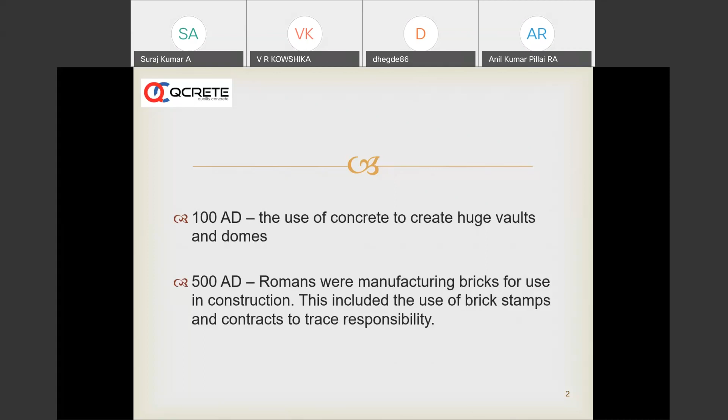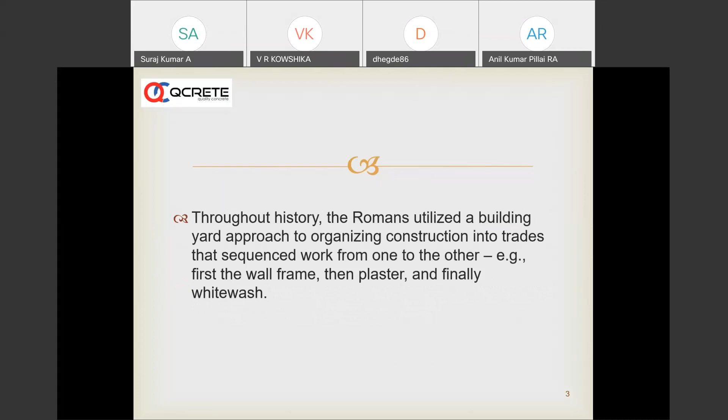The QAQC of construction as a whole is not new. It has existed for centuries, maybe thousands of years ago. The first such usage of QAQC systems was found in 100 AD, when huge vaults and domes were built of concrete, definitely with a lot of planning and QAQC management. Around 500 AD, Romans were manufacturing bricks for construction and included stamps and contracts to trace responsibility, which is part of QAQC. Throughout history, the Romans utilized a building yard approach, organizing construction into trades that sequenced work from one to another - first the wall, then plaster, and finally whitewash. These structures have stood for more than 2000 years, as seen in Machu Picchu, Peru, where stones have been arranged in a curved fashion. The kind of stone organization seen there would not have been possible without strong QAQC.

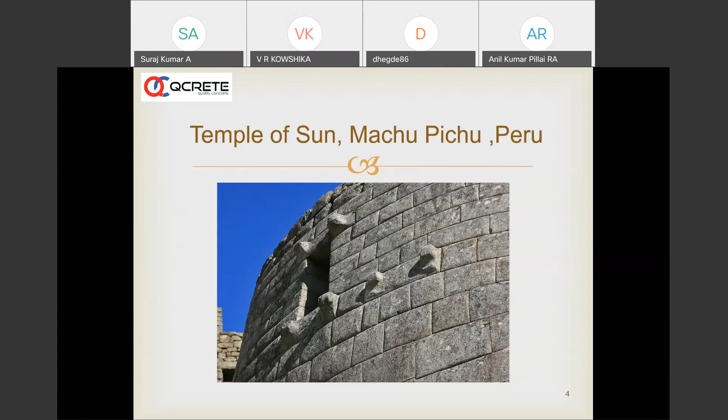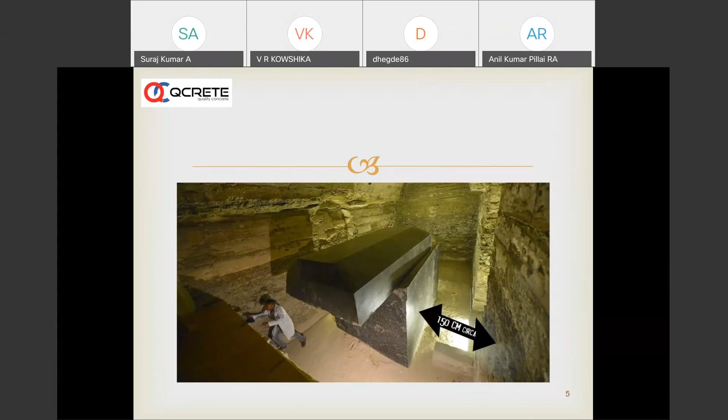Similarly, most baffling aspects can be seen when we visit Egypt. If you go to Saqqara, about 70 kilometers from Cairo, you can see huge granite stones - boxes. God knows what they were planning to keep inside; we don't know. They are highly polished. You can see how, at 90 degrees, the walls have been carved and placed in Saqqara, Djoser, Egypt. This is approximately more than 5,500 years ago. The first kind of stepped pyramids were found in Djoser.

So what we are talking about is quality aspects and QAQC systems. What we are adopting in construction as well as in concrete is not new - our ancestors exhibited and demonstrated high levels of QAQC knowledge and systems in these kinds of structures. The structures we build with concrete today can be seen, in comparison, as infant steps. Huge buildings were built with a high degree of precision thousands of years ago. What we are doing today, like Burj Khalifa and others, after so many years with so much knowledge and improvement in materials, probably will not stand the test of time. So on one hand we have introduced ourselves to modern materials; on the other hand, probably the durability has been lost.

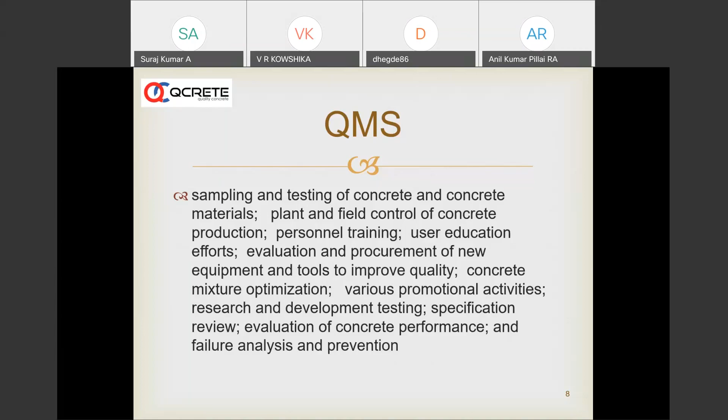Coming to the topic of the day - for example, if you refer to IS 4926, we have three pillars with respect to ready-mix concrete. It has three different aspects: one is forward control, one is immediate control, and another is retrospective control. These are the three pillars of ready-mix concrete we are talking about. The same controls can also be extended to any industry for that matter.

And then the last one, the retrospective control, that is the set of all activities that we do after production. These activities cannot be done during or before production; they should be done after production. So these are called retrospective controls.

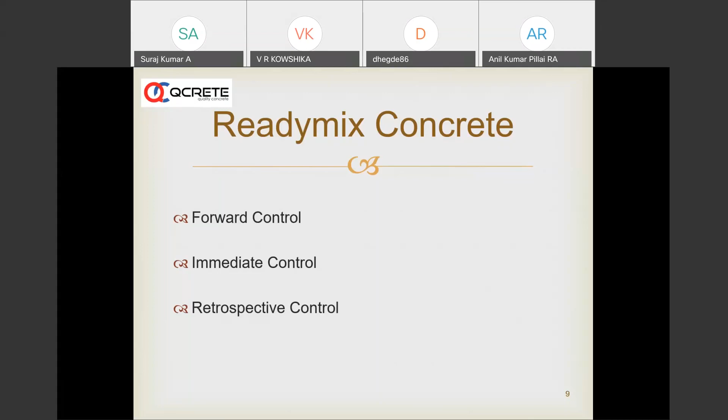I will go a little deeper into most of these aspects, the three pillars. The first one, as we said, is forward control. Forward control consists of the beginning control of purchased material.

Generally when we get aggregates, sand, anything, we do visual checks, take some samples, and do basic tests like grading. We also expect aggregate or sand suppliers to have some sort of certification or testing. We visit their quarries and aggregate production units to check what kind of basic testing they are doing.

We get this information from suppliers. Suppose the suppliers are supplying to other concrete plants or construction sites, we get all data about specific gravity, grading, etc. from the aggregate suppliers.

Most importantly, as the first step in forward control, recognizing suppliers as partners. Earlier, many vendors were not treated well, but for an organization or a ready-mix company to grow in a systematic, organized, proper way, we need to consider and respect the vendors and work with them.

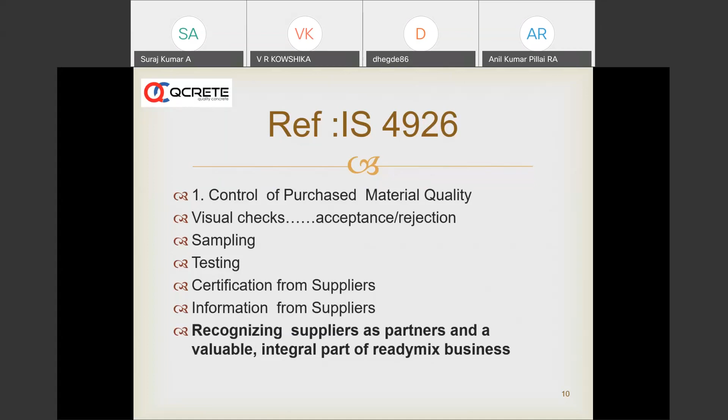So materials, when received, most of the materials are weighed. Incoming materials are all weighed, and the finished product also will be weighed sometimes, but most of the materials that come in are weighed. This is very important as a part of stock control, as a part of inward control.

Then purchase basis - how we are going to purchase the materials - is based on availability. The material should be easily available, and product quality should be as per the corresponding codes, preferably IS codes.

And then long-term relationships - how they are behaving with the particular company, whether they are giving consistent supplies, timely deliveries. Whenever we ask quickly for a particular material, maybe aggregates or cement, how quickly they respond.

Material costs are most important, of course, in an era where all ready-mix companies are competing. Material costs are of prime importance, as well as freight costs. A metal, GGBS, or cement may be of the highest quality, but we cannot bring it from a long distance. So it is better to bring materials from the lowest distance.

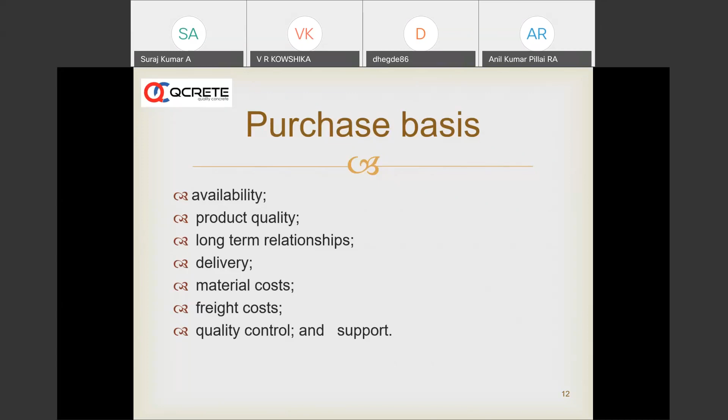Control of material is another aspect coming under forward control - prevention of contamination and drainage of aggregates. Prevention of contamination is most important. For example, we see in some ready-mix companies that 20mm, 12mm aggregates and sand all get mixed.

So what happens in this case, if the 20mm, 12mm aggregates and sand get mixed, the batcher at the batching point will be observing the computer thinking the 20mm aggregate is going in - say 580 kgs of 20mm. But what's actually happening is, within that 580 kg, maybe 100 kgs is sand due to intermixing.

Intermixing happens in many companies. The front-end operators or loading operators don't take care of this, and if it gets mixed, the mix design we give is one thing, but what actually comes out and gets supplied to the customer is another thing entirely from what we wrote as the mix design.

So prevention of contamination - falling of leaves, falling of debris, or other unacceptable things falling onto the aggregates - all these things have to be avoided. And then drainage, especially in monsoon season, you have a lot of water.

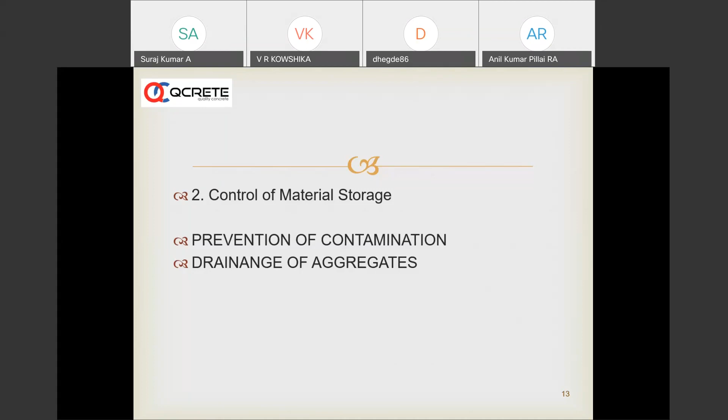There should not be any confusion about which silo stores what material. There should be proper storage and documentation. Generally, you have one or two silos reserved for OPC cement, another for GGBS or fly ash, and they have to be labeled properly.

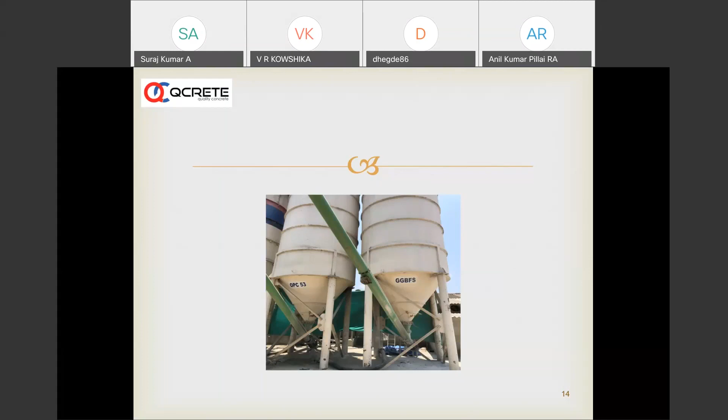When someone names a silo, the batcher or QC, or both in combination, should ensure the right material goes to the right silo. Traceability of materials from receipt to finished goods is an important aspect. For example, a ready mix company should be able to trace which cement has gone to which concrete, which customer, and which aggregates or admixture has gone to which customer. All ingredients from receipt to delivery, until finished goods are supplied, should be traceable back to their sources at any point in time. That is one of the important aspects of forward control.

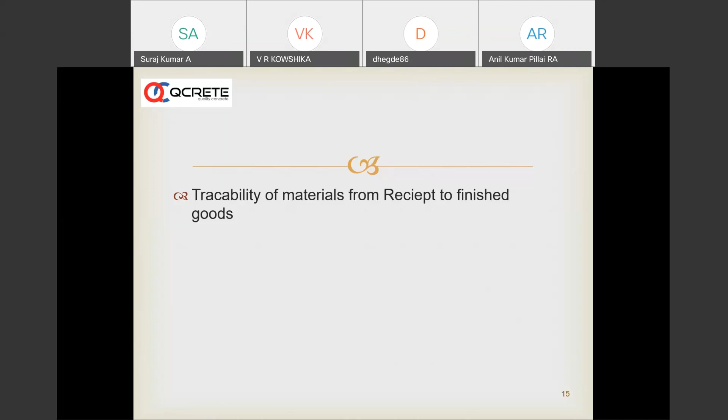Mix design and mix design modification: in a ready mix company, normally qualified engineers do the mix design. They will have a lot of data. Our company, for example, has data from the last 2-3 years, and many companies have this kind of data and history of mix performance. Trials are constantly done as part of continued evaluation of the mixes and continuous improvement.

Most importantly, understanding customer requirements is important. We need to know what the concrete is being used for. For example, a requirement comes for M30 concrete - we need to know whether it is for a floor slab, an industrial floor, or a sloped roof. Sometimes a customer comes with 150 or 200 cubic meters of concrete for a raft foundation or a small foundation, and we need to know whether the foundation is very thick. If it is very thick, we need to recommend SCM-blended concrete, as the heat of hydration will be more. All these things need to be understood.

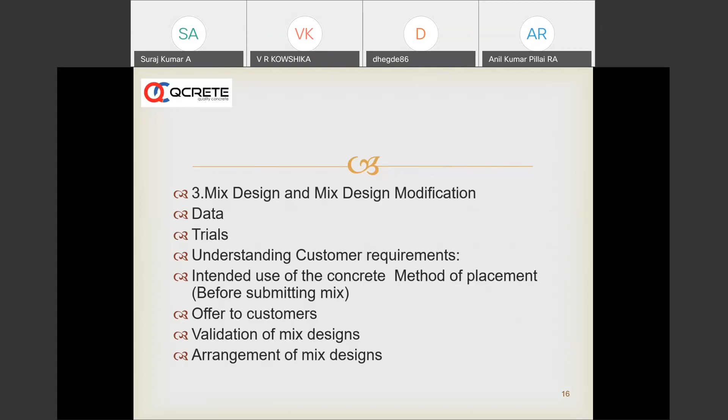Plant maintenance is also an important aspect. We need to maintain transfer and weighing equipment, with controlled flow of materials. Weighing scales have to be regularly calibrated - about every 3 months as per IS code, IS 4926. Many corporate, organized companies do monthly calibration of weigh scales, and we need proper documentation of this.

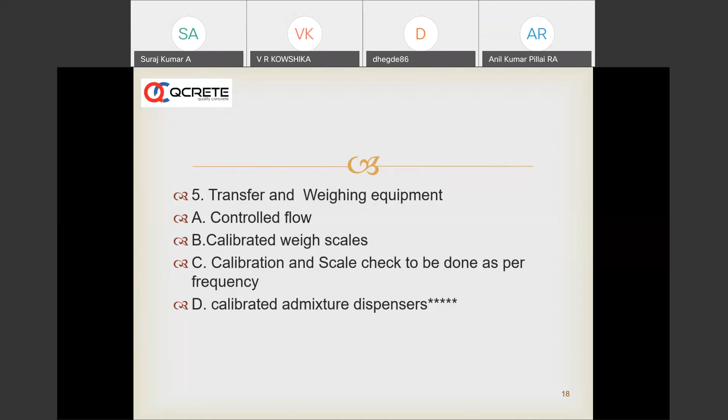Admixture dispensers are very important and need more frequent checking - maybe every 15 days, 2 weeks, or 3 weeks - we need to check the calibration of admixture dispensers, because if the admixture dosage goes more or less, it will be a problem for the concrete.

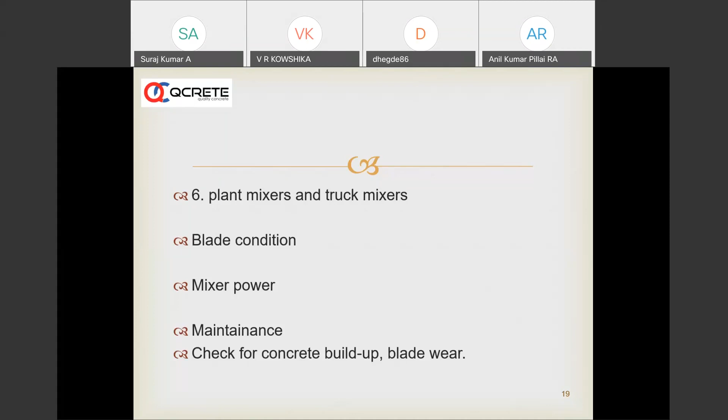Plant mixers and truck mixers - blade condition has to be checked, along with mixer power consumption to see if something has happened. Maintenance has to be checked, and whether there is build-up inside the concrete truck. If trucks are not maintained well and old concrete accumulates inside, it can mix with new concrete and cause problems for the customer. So the operations department in a ready mix company or any concrete producer should constantly check maintenance as per scheduled frequencies.

These are some of the points that we need to do before production, and in this we also deal a lot with different kinds of materials, and all these materials have to qualify as per IS codes. If, for example, we are trying to introduce a new product, if there is any other code, whether a European code or an ASTM code, that can be used.

And if you are using any product or ingredient in the concrete which is not conforming to IS, we need to have a lot of data, and it should be approved by the corresponding structural engineer or any of the consultants before we make use of it in concrete.

Now, moving on to the second pillar, which is the immediate control. Immediate control is, as we discussed earlier, the set of all activities that we do at the point of production, at the time of production. So the most important thing that we do at the point of production is proper control of slump.

Proper control of slump is indirectly proper control of water cement ratio, and this can be achieved by properly feeding to the software or the batching computer the moisture on 20 mm, 12 mm and sand, and moisture is fed at least 2 to 3 times in monsoon on a rainy day.

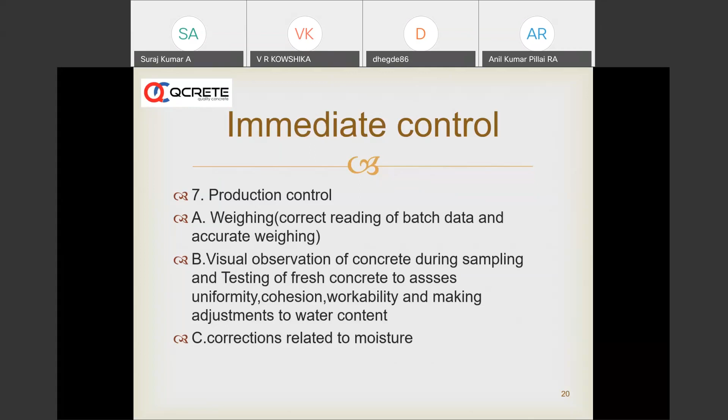When we are talking about product control, we have sampling done at the plant randomly. Some of the ready mix companies, like our company, check every truck before sending. As soon as the production takes place, we take some sample and check it in most of the trucks, and then measuring and recording the slump is important. Measuring the temperature at the plant, and then we check the slump retention.

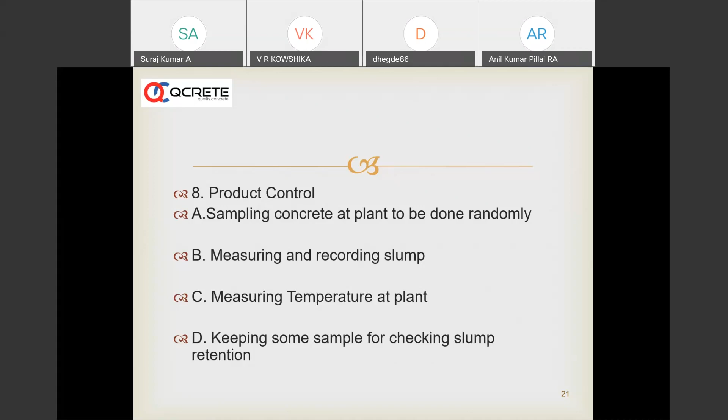For example, the concrete truck has to travel for, let us say, 1.5 hours to deliver the concrete. So we take the sample at the batching plant, keep it for 1.5 hours, and observe how it behaves after 1.5 hours, especially with respect to the fresh properties. And sometimes we take cubes out of this concrete which is kept for observation of slump. So these are the checks that we do as a part of product control.

So during the fresh state, we also check yield, which is in other words checking the plastic density of concrete, and this plastic density of concrete is checked and compared with the theoretical density.

Also for trucks, we take the initial truck weighment and then final truck weighment with and without concrete, and then we compare the concrete weight with the theoretical density, just to check whether the plastic density and yield that we are doing is right. So these are part of the immediate control.

Then comes the retrospective control. Retrospective control is, as we discussed earlier, the set of all activities that we do after production. After production, it comprises strength monitoring at site, sampling at site, remixing, casting as per standards, protecting cubes in place, curing at the right temperature, crushing cubes, and recording.

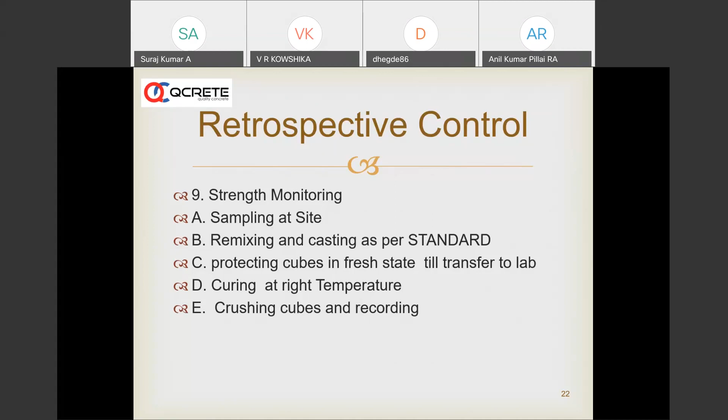These are the set of activities that we do, and you can see some of these things that we do on site. For SCC concrete, you can see a very cohesive mix, which is exhibited here. No bleeding. So at site, if we are talking about SCC concrete, it has to be bleeding free. It has to be a very cohesive and homogeneous mix.

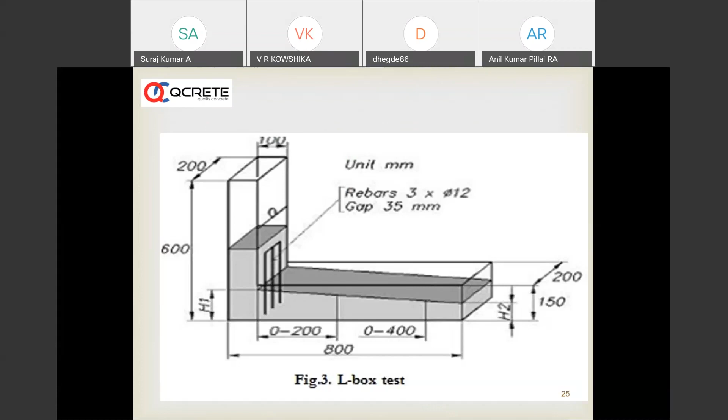And this is an L box test that we do for SCC. L box, which we do for SCC concrete. A V funnel, for example: we put the concrete here in this V funnel, and it has to be collected, and the time for falling and filling into this bucket should be about 6 to 12 seconds. So these are some of the tests that we do on SCC as a retrospective control.

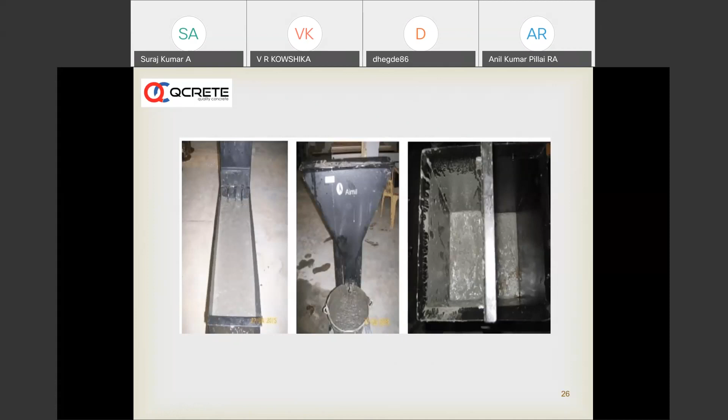Fundamentally, the most important aspect that many companies and many individuals, concrete technologists and engineers don't care about is the way sampling and testing is done. It is very unfortunate that this is one of the most neglected areas in the QAQC of concrete and construction. The retrospective control pillar is many times shaken because of negligence or ignorance or non-implementation of some basic procedures which we are talking about now.

Actually, one of the things is that the concrete has to be sampled in a very specific and systematic way, as discussed in a standard. For example, IS 4926 very clearly says that when the truck reaches the site, the truck has to be mixed with high speed turning of the drum, and then about 0.3 cubic meters of the concrete has to be left onto the pump, and then after leaving 0.3 meter cube onto the pump, you have to take the concrete sample for slump and casting cubes.

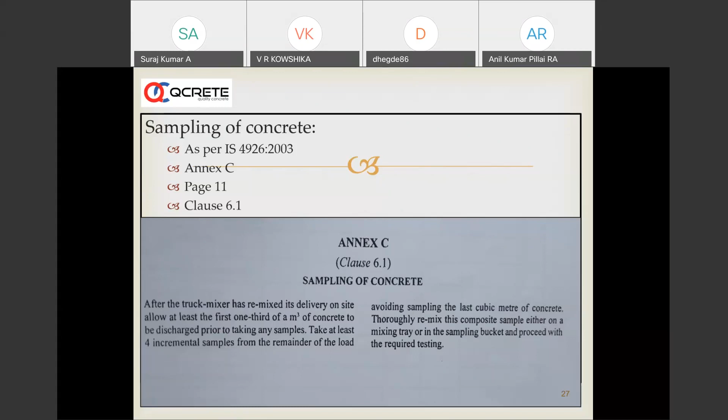There are other codes which clearly speak about the method of sampling. BS 1881 is a very well researched document where they talk about leaving the first 1 cubic meter of concrete to go down the chute into the pump or onto the structure, and then you take the concrete sample, running the scoop at right angles to the flow of concrete in several scoops at regular intervals. Means you have to leave the first part, and you should not take the concrete sample from the last part. In between, at regular intervals, you can take the sample. That is how the sampling has to be done as far as BS 1881 is concerned.

There is also another method which is closer to the IS method we discussed earlier. This is called spot sampling, where they talk about leaving about 0.3 cubic meters of concrete from the truck onto the pump or onto the element, and then you start taking the sample. And they specifically say that the alternative method, spot sampling, is only for checking the slump and not for casting the cubes. So if we want a composite sample for both slump and strength, we have to use the first method, which is the standard method of doing the sampling. Actually, this is the only way that we have to do it.

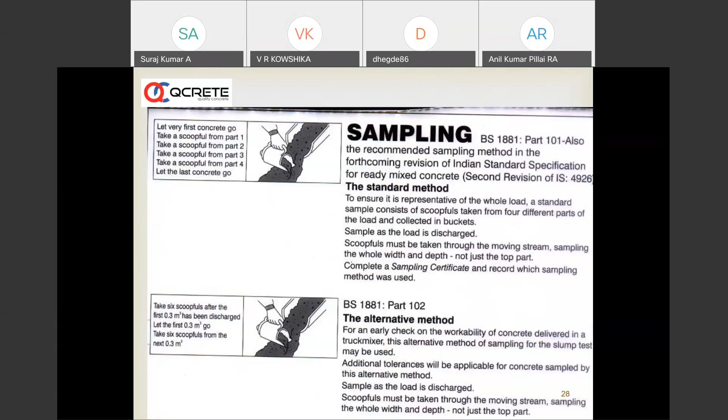Actually, even ASTM C94 is the other method established in America, Canada, etc. They talk about first leaving 10% of the concrete, the last 10% also you should leave, and in between you have to take the concrete. So this is a very important aspect in the retrospective quality control. Then, what do you do when the slump is less?

What do you do if the slump is less? If the slump is less, as per ACI 212.4R, and it is even discussed in IS 4926, you can have a small addition of admixture on site by trained technicians. Generally we add about 0.1 to 0.2 or 0.3% maximum by weight of cement or cementitious system. Generally it will be about half a liter or 1 liter of admixture diluted in

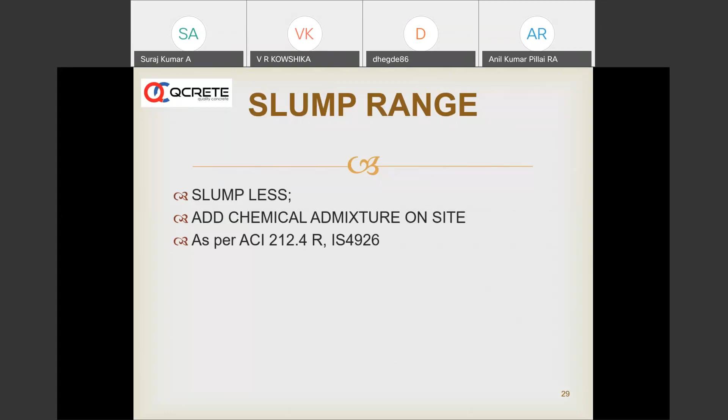about 5 liters of water, because if you don't dilute it, the admixture cannot be spread uniformly in the entire body of concrete. So that is why we say you take a little amount of admixture, about half a liter or 1 liter, dilute it in about 5 to 10 liters, and then mix it thoroughly before you unload to boost the slump. So this is a very well accepted method if the slump is less.

If the slump is more, what do you do as one of the important steps in terms of retrospective control? Let us say we take the concrete and we find that the slump is more. Why does this happen? The slump can be more because of more water. It could have come because of a wrong moisture content given in the batching plant, which will lead to a higher water-cement ratio. Maybe coarser aggregates: aggregates which during the mix design were taken with a certain gradation have become coarser. Sand has become coarser. Chemical admixture might have gone more. Maybe a wrong batching.

From cement to cement, some variations will take place. It is said that brand to brand, plant to plant variations will occur. That is a different matter; we will not discuss it here. So sometimes if we are changing from one brand to another, the behavior of concrete will be different in both fresh and hardened state. So we need to take care of that. Especially, a particular brand can give more slump retention, another brand can give lesser slump retention.

Another point we need to discuss: let us say the mix design is done for 3 hours slump retention. Somebody wants the concrete to have a 150 slump after 3 hours. For whatever reason, he has told the ready mix company to give a mix which is going to give 150 slump after 3 hours. The truck reaches the site in 1 hour. So definitely the slump will be out of spec at that time, and it will be very high if the truck reaches much earlier than anticipated. So these things can happen.

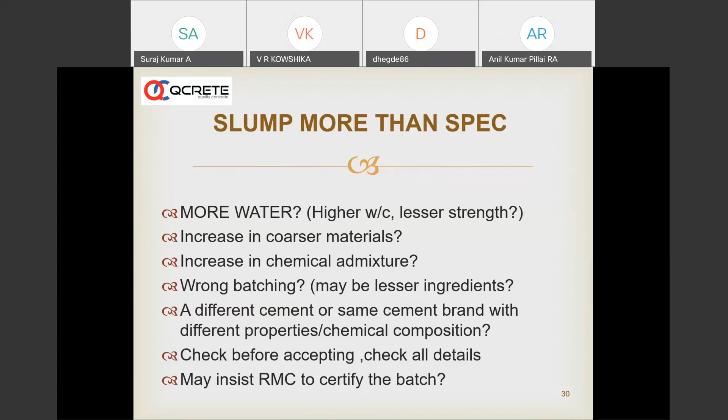Making of cubes also has to be done systematically. There is an elaborate method described in IS 1199, and a standard procedure explained in IS 516:1959 about making of cubes. We can have 35 strokes, 3 layers, and many times we neglect this. Untrained personnel will do the casting of cubes in different ways. If the compaction is not good, if the casting is improper, and if the cubes which are cast are not protected immediately before we transfer them to the main lab or a curing facility, then it will be a problem.

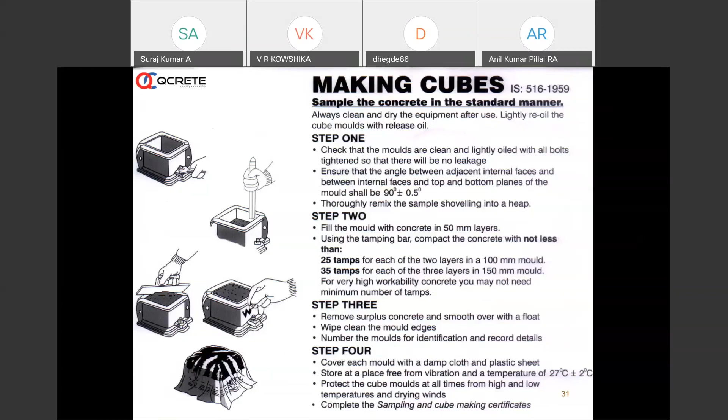Yield check we have already discussed as part of retrospective control. You can say it falls in both immediate as well as retrospective control. Generally, it is done as part of retrospective control, as it is required to check how many cubic meters of concrete we have supplied, whether we are supplying the exact cubic meters ordered, whether the theoretical density and plastic density are matching, and whether we have batched right. To check that, the yield test is done, and it is properly described in IS 1199.

And at least once a day, we need to take this yield check and match it with the weight of the concrete that we have batched in the truck. We also have to check how much is batched as per the batch record. In the batch record, the theoretical recipe and the total batched material should match each other.

We also have to check the weight of the concrete in the truck divided by the volume, say 6 cubic meters or 7 cubic meters, and this should match the plastic density, and that should match the theoretical density. All this should be matched to check the yield. And then we have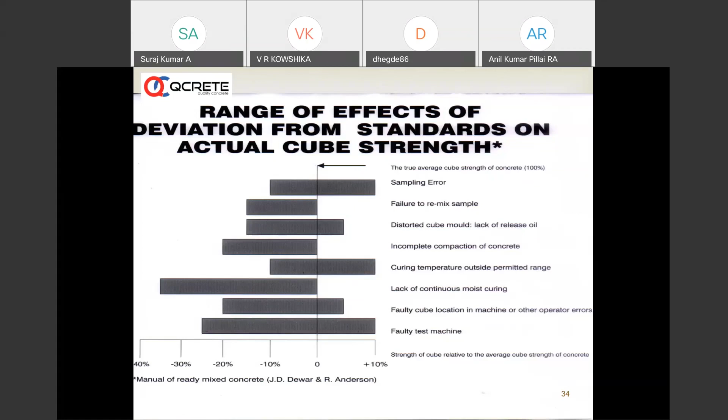We need to keep the structure cooler. We need to do the ponding on structures, at least as IS describes. Especially if you are blending with fly ash or GGBS, 14 days is a must. I know many times it is difficult in big projects, but we need to follow that. As far as lab curing is concerned, we need to cure in standard condition, 27 plus or minus 2 degrees.

The producer has the responsibility to provide the following information: nature and source of each constituent, source of supply of cement - the customer can ask. Proportions, mix design - the customer can ask, and it has to be given. It has to be validated by the customer. Then admixture, what kind of admixture - all these things need to be given to the customer. The invoice, DC, or challan that comes along with the truck should be as per IS 4926, with all the details given in 4926 Annexure G.

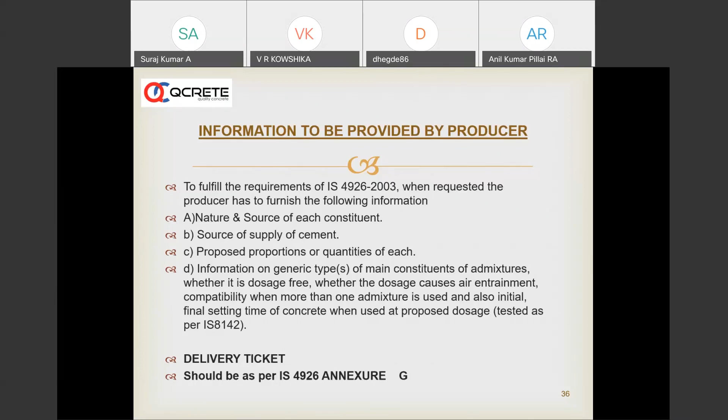As a customer, to check whether all the three pillars of QAQC which we talked about are happening or not, we can have a quick check. A ready mix company can be audited or checked by the customer - whether all materials are selected as per IS 456, or testing is done as per the frequency given in IS 4926, and as far as the company quality manual goes.

Steps at the batching plant to prevent contamination - whether it is there or not, or intermixing is happening, calibration of batching plant is happening as per frequency, maintenance of batching plant as per schedules, calibration of lab equipment - for example CTM every 6 months, and other equipment. All these things, whether done yearly, and whether checks are happening at the batching plant - slump, moisture correction, everything.

Then at site, we have some checks to be done. What are the checks? Whether the concrete reaches the site, the concrete has to be consumed within 2 hours or 3 hours. All these things need to be checked on site, and we need to have a complete understanding whether the producer is doing forward, intermediate, and retrospective controls. All these things have to be checked by the customer.

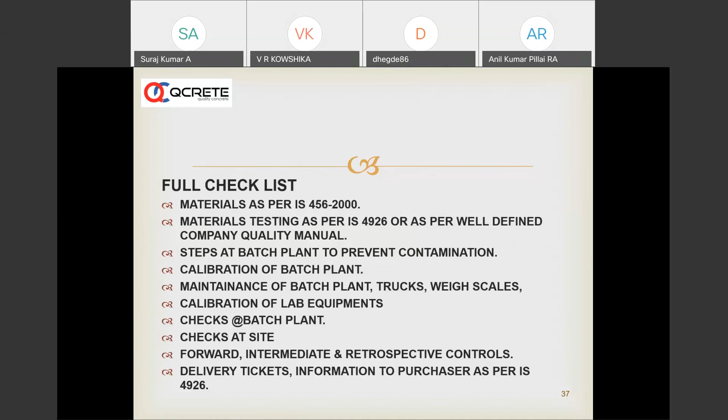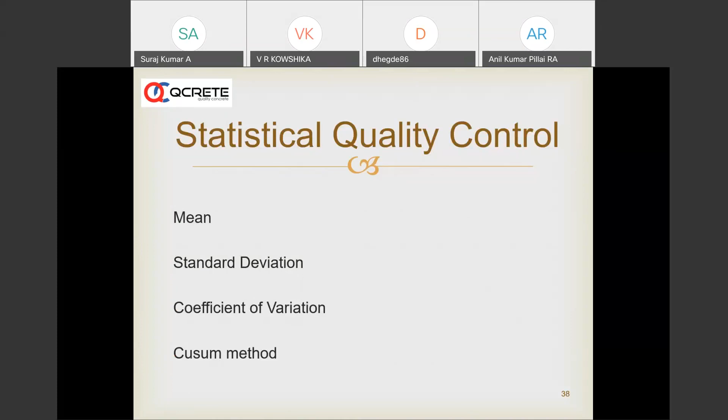As part of retrospective control, the ready mix producer will also do mean, standard deviation, coefficient of variation. All these things are done at a batching plant as part of statistical study, as part of retrospective control. The standard deviation, mean, and all is checked on a monthly basis for different mixes.

Going forward, as far as the acceptance criteria is concerned, we have the acceptance criteria as given in IS 456. We need to check whether we are doing as per this or not.

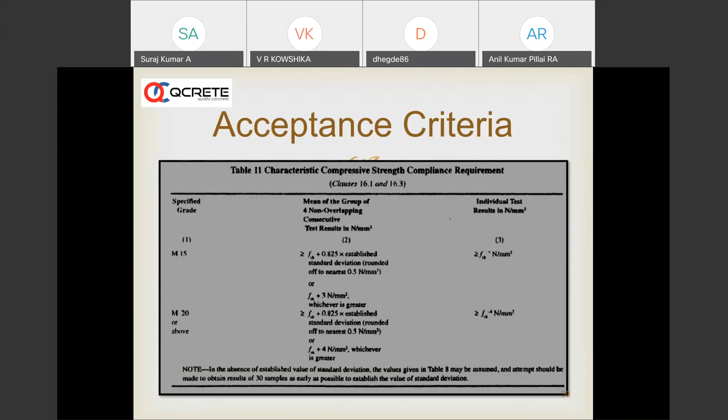Again, we have two kinds of mixes - design mixes, where the mix design is done as per IS 10262. A concrete producer will have a range of mixes which are obtained by trials, also can be based on previous data, but this has to correspond to the guidelines as given in 10262.

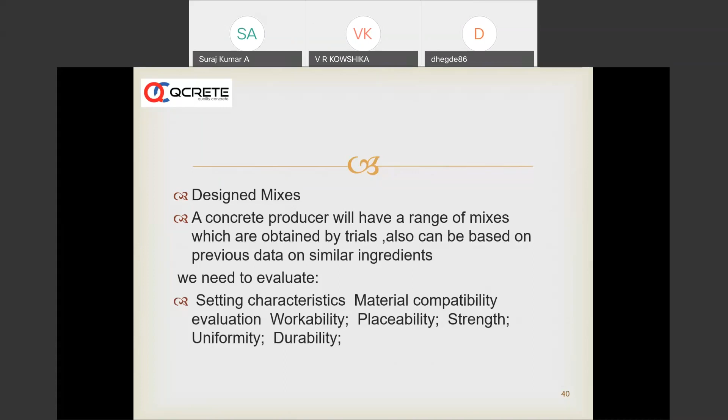We also need to evaluate setting characteristic, material compatibility, workability, placeability, strength, uniformity, and durability. This is a continuous process, and it is also based on the retrospective control that we do. Every time we get the strengths and all, every month we analyze whether the mean is okay, standard deviation is okay, everything is going in the right direction, or if any corrections have to be done.

One customer comes, he says, I want 350 kg OPC and I want this much sand, this much aggregate, and this much water in this. This is just like a...

So here, you have to mix like this, and the responsibility of a ready mix company is just to mix what the customer has asked, and demonstrate to the customer at any point of time, give evidence to the customer at any point of time that he has mixed all these materials as per the standards, as per agreed terms.

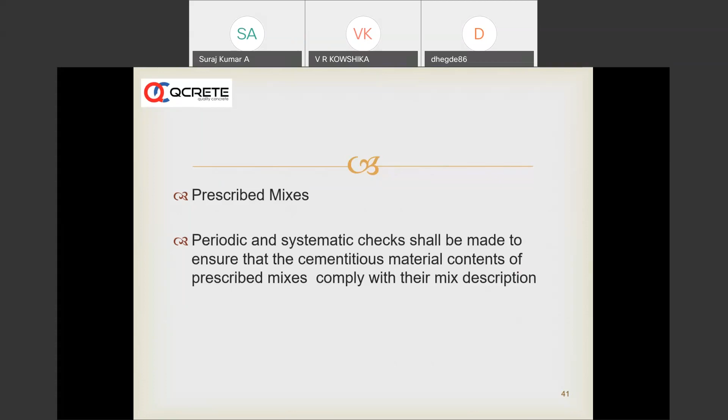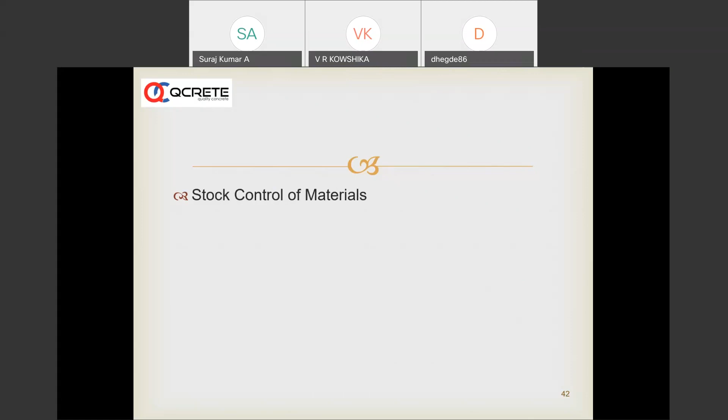Stock control of materials is also part of retrospective control. Whatever has come - let us say we have done 1000 cubic meters of concrete for a customer, each mix having about 400 kgs of cement - so inward and outward need to be tallied. So whether the cement has gone right or wrong, we need to check. This is part of retrospective control, stock control of materials.

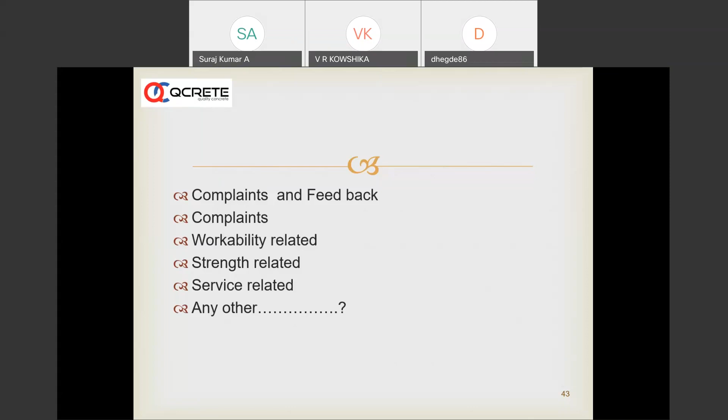Complaints and feedback - we have a proper method of documenting, reviewing, and resolving complaints and feedback from customers. It can be workability related, strength related, service related - like whether the pump or concrete has reached in time, delivered in time, or any other complaints. We have a proper procedure of reviewing and resolving the complaints. This is part of retrospective control.

In a ready mix company, we should also take further steps to identify customers, both internal and external. We have internal customers, like other department people who are also looking into the concrete, who are also giving feedback on different aspects of concrete, both on the fresh state and hardened state, that we need to be monitoring.

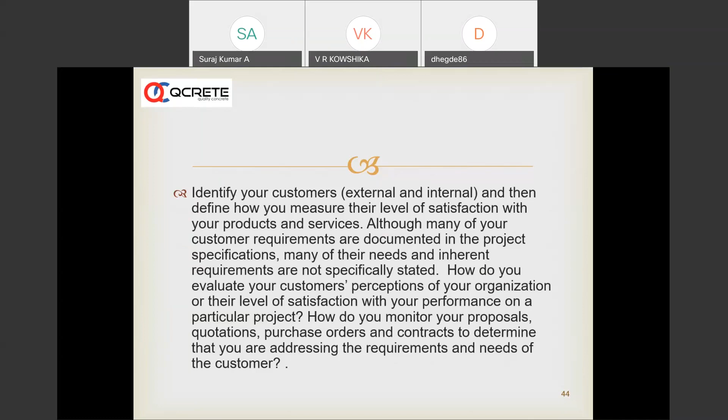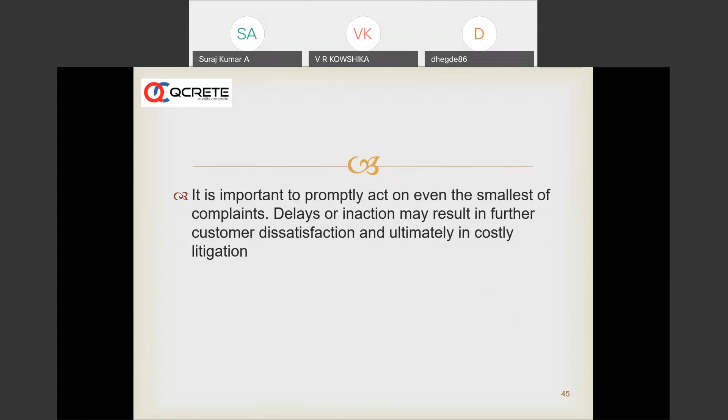It is very important to promptly act on even the smallest of complaints. Delays or inaction may result in further customer dissatisfaction. Ultimately, the three pillars we discussed are designed to give maximum customer satisfaction. So any small complaint, if not taken properly in the right spirit and not attended to in time, can lead to customer dissatisfaction, and this is not the objective of the three pillars of QAQC which we are talking about.

Most importantly, as part of the three pillars of QAQC of ready-mix concrete, the three pillars can be strong and give ultimate customer satisfaction, provided the different levels of people in the company, including top management down to the lowest level employee in the ready-mix company, are trained continuously and their competencies are mapped. Any gaps or weaknesses in their competencies are identified, and continuous evaluation and enhancement of abilities has to take place, which will lead to more customer satisfaction. This is also an extended third pillar, that is retrospective control.

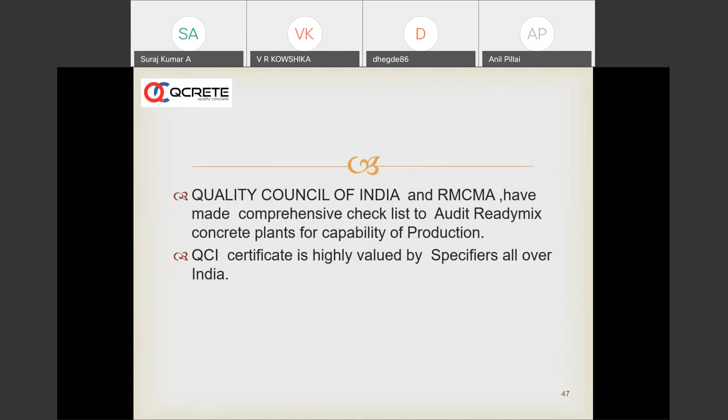Quality Council of India has taken cognizance of this, especially based on the recommendations given in IS 4926, and they have made a comprehensive checklist to audit a ready-mix concrete plant, to check whether they are capable of producing concrete to the level of customer satisfaction. So the QCI certificate is highly valued by specifiers all over India. This is, you can say, a stamp of class given by the QCI.

So the three pillars which we talked about are preventative. The primary intent of all quality programs is to get ahead of and avoid quality issues, ultimately by doing work right the first time. We eliminate rework, avoid loss of productivity of having to resolve issues, and avoid generation of waste.

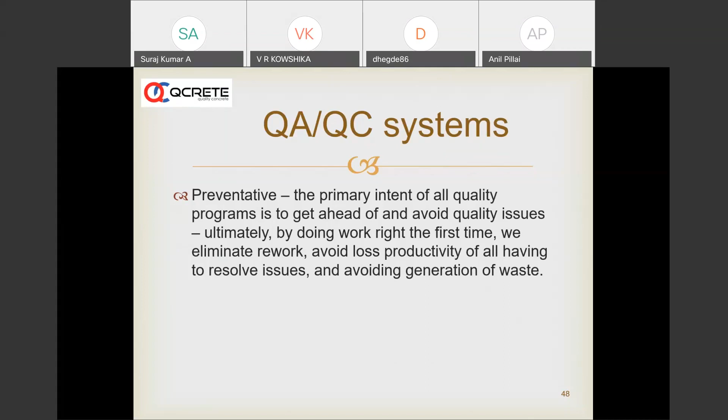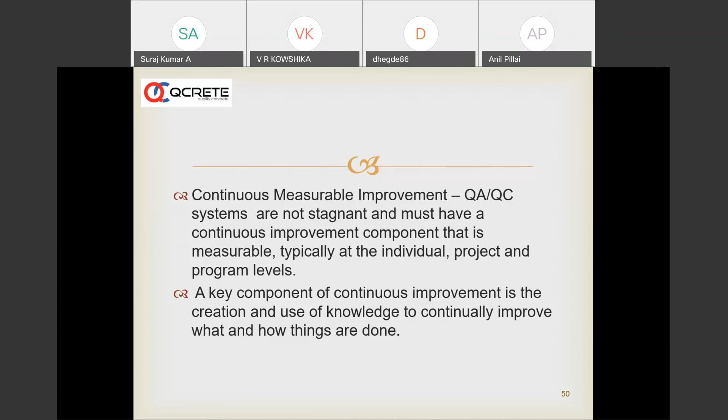Then predictive, and most importantly, continuous measurable improvement should be there. QAQC systems are not stagnant. The three pillars are rigidly built to support higher final product quality, but they are dynamic. They should be in continuous improvement, and review should take place. A key component of continuous improvement is the creation and use of knowledge to continually improve what and how things are done, and it should be a collaborative effort.

Collaborative efforts. Quality is not a result of an individual, it is not a game of an individual. It is like cricket or any other game where all the members of the team are involved. All the members have a bearing on the final product. For example, in a ready-mix company, you can supply the best concrete, and then it can be spoiled at the end. If the concrete, when it reaches the site, the site engineer or supervisor at the receiving end, just says add water and pump the concrete, that becomes a dilution in quality. So it is not the work of one person. It is collaborative at all levels, including important members like the customer's engineers and supervisors.

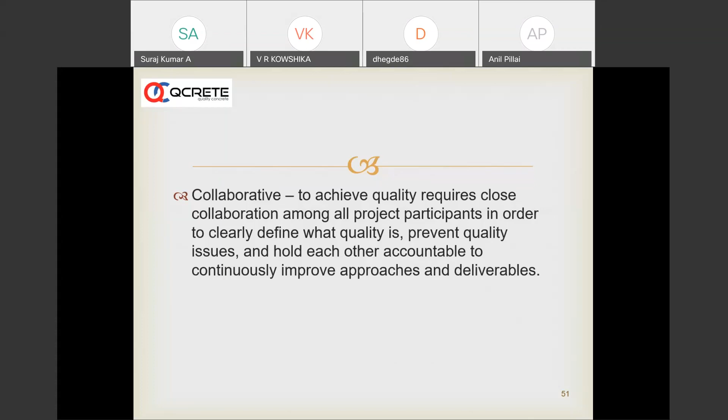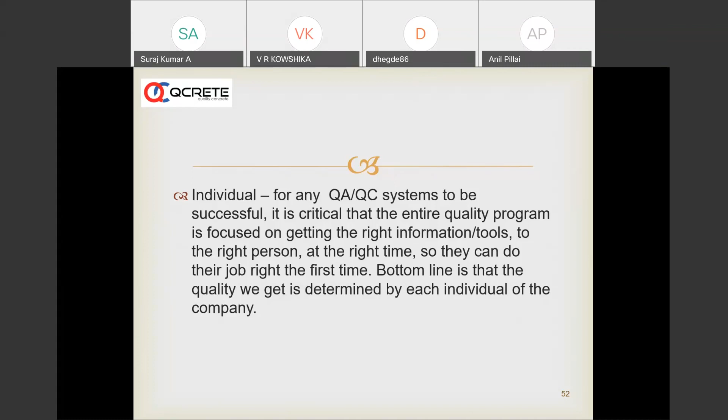And each individual should be made strong in a QAQC system. In the three pillars of ready-mix concrete that we are talking about, within the company and outside the company, when we are transporting the concrete, after transporting it, something can happen. At the time of placing, something can happen. Anything can go wrong if the user, or any of the stakeholders, at any point of time, makes a mistake. So each individual is important. We need to train each individual.

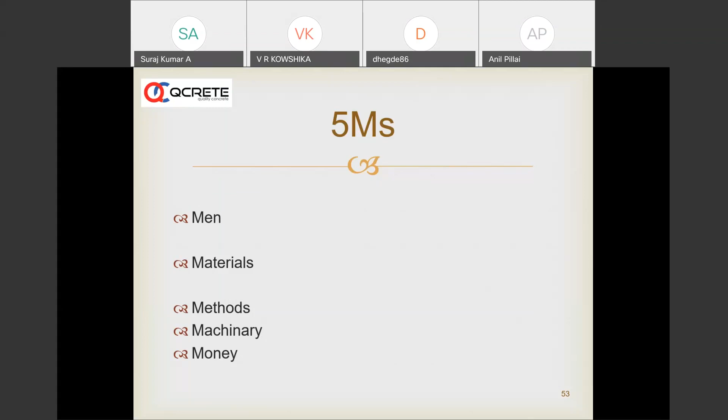As part of the three pillars, we are talking about another aspect, that is the 5 M's: men, materials, methods, machinery, money. Men should be trained well. Materials should be selected as per IS codes or any other code with proper data, and methods should be properly defined. Machinery should be well maintained, and of course we cannot do all these activities without money.

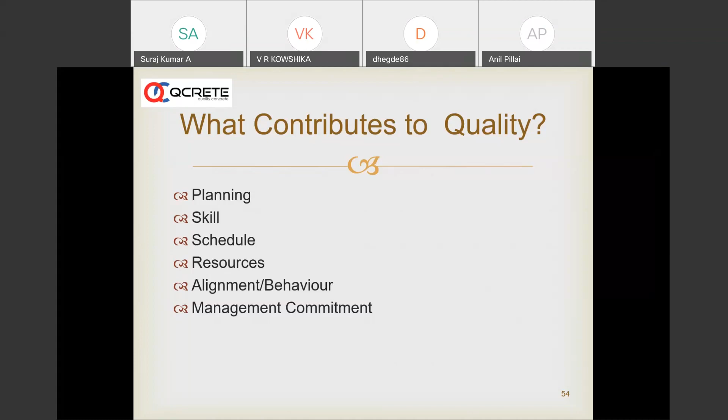For the three pillars, what we are talking about, if we need a successful implementation of the three pillars of ready-mix concrete, there should be enough planning, skill, schedule, resources, alignment, behavior, and management commitment - most important, management commitment. We can have a very big quality manual, as we have seen in some big companies, but whether top people are really committed to quality or not is the question. And then resources - let's say in a ready mix company we have 5 trucks which can do about 150 cubic meters in a day at a nearby site, so we cannot take a job of 300 cubic meters with 5 trucks. So proper utilization of resources, planning and scheduling are all part of the three pillars we are talking about.

So the three pillars again - forward control, immediate control, retrospective control - are a set of all these activities which will lead to ultimate customer satisfaction in the ready mix company. As I said earlier, the three pillars of QAQC systems of ready mix concrete can also be used or extended to any other industry, irrespective of what somebody is manufacturing.